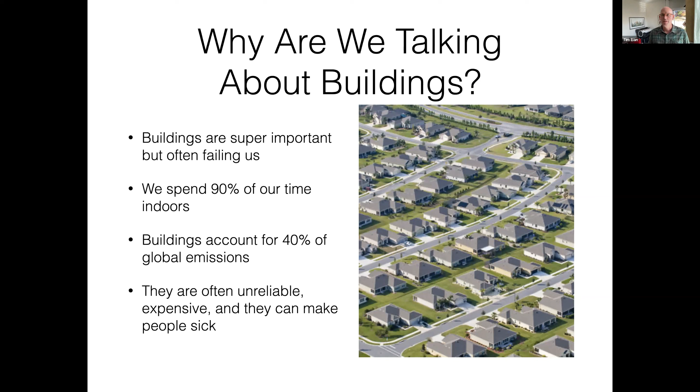So often the first question is, why are we even talking about this? Aren't all buildings green? Well, in reality, buildings are very important to us, but they're often failing us. We spend a lot of time indoors, and buildings account for 40%, some say even more, of global emissions. And they're often unreliable, expensive, and they can make people sick. So these are the reasons why we're still talking about green building.

So if we for a moment imagine the perfect building, for school, a home, a workplace, entertainment, how would most people describe it? And we're in a cold climate here. So what I hear most commonly is, people want it warm in the winter. They want it cool in the summer. They don't want drafts. They want low energy bills and little to no fossil fuel use.

They want it to be affordable to build and operate, so we're looking at life cycle costs perhaps. Buildings should be healthy and free from smoke, soot, pollen, mold, and bugs. And they should shelter us even in extreme weather events or during power outages. For those living in busy environments, they should be quiet, and they should be a little bit of a retreat, a place where you can think.

And the good news is that all of this is real. In 1991, a guy named Wolfgang Feist built the first passive house in the world in Darmstadt, Germany. And that's what I'm going to talk about today, how passive house delivers on all those fronts.

So let's start with the textbook definition. What is that even? Well, first of all, it's a rigorous voluntary building energy standard focusing on the highest energy efficiency and quality of life at low operating cost. So you can already get a sense that we're answering some of what people want with this program.

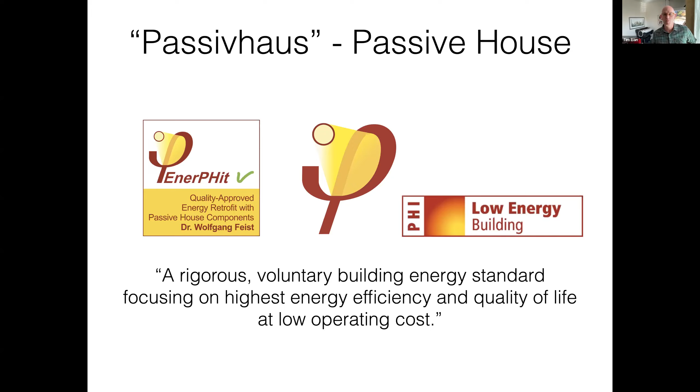It is a global standard. So the concept behind it is to think globally but build locally, and it is climate zone specific. So these buildings will adapt and look slightly different depending on where you are on the planet. It's also a building standard that applies to all building types.

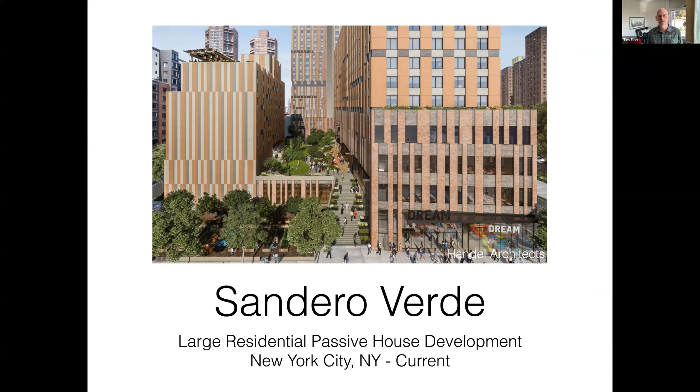I'll give you just a few recent highlights. The city of Frankfurt built a new general hospital that is fully passive house certified, completed earlier this year. In New York City, there's a full block development underway with hundreds of living units and some mixed use units that is a passive house project. In Vancouver, they're working on the tallest passive house skyscraper in the world right now, called The Curv.

It's a third-party certification, and it's really a vetted tool for sustainable design. So it exists on a global scale, and it's been vetted by organizations like ASHRAE, for example, for accuracy and how it's applicable in our environment.

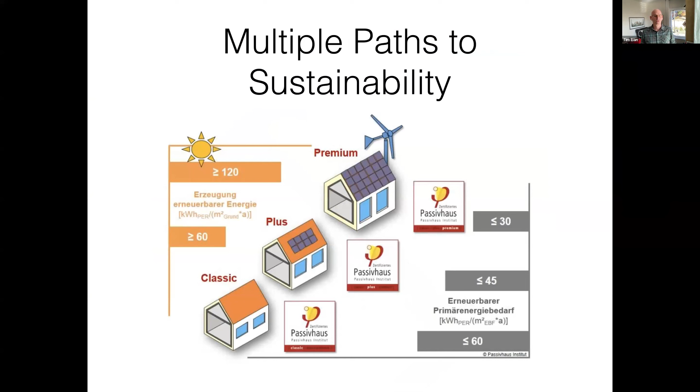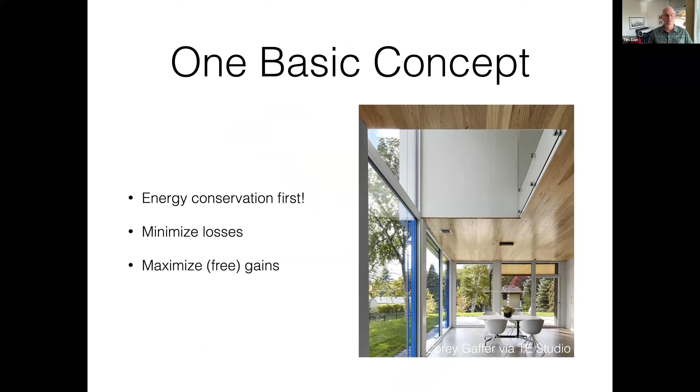It offers multiple tracks, as some other standards do as well. There's sort of a classic, plus, and premium. There's also a retrofit component. And it really revolves around one basic concept, and that is energy conservation first. Let's get rid of wasteful energy use, so minimize our losses and maximize our free gains.

We bring in an adequate ventilation strategy, typically with a heat recovery ventilation system. We air seal the building really tightly so that we don't have any drafts coming in or any heat loss going out. And then last but not least, by design, we reduce what's called thermal bridges, which are generally like superhighways for energy to escape a building through envelope imperfections.

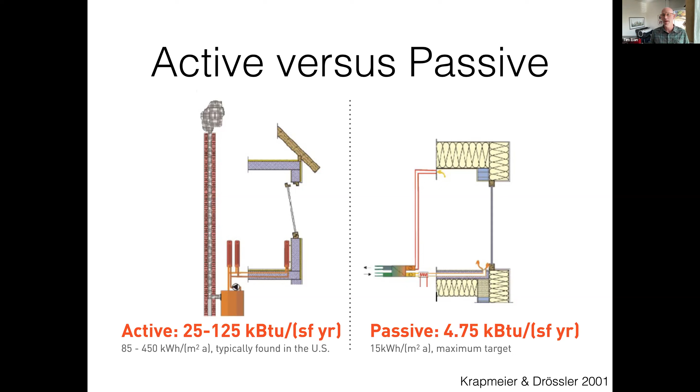Passive house gets its name from the paradigm shift. We're literally moving from buildings that rely on large active heating, cooling, or ventilation systems to something that's much more self-sufficient and is based on passive strategies such as insulation, air sealing, energy retention, and then getting warmed by passive means like passive solar heat gains, for instance. And so generally you can expect a reduction in heating energy need by about 90% over quote normal buildings when you go down the passive house path. So it's really a paradigm shift.

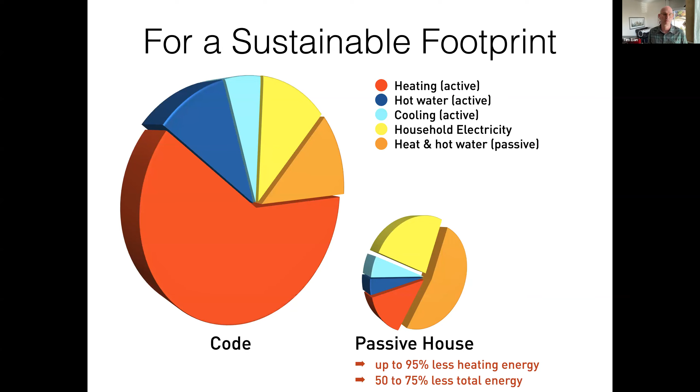A study we conducted in Minnesota showed that if you take the same home, design it to Minnesota code, and then design it to passive house standards, you can expect up to 90, sometimes up to 95% less heating energy use, and 50 to 75% less total energy use. Also, the way energy gets used changes entirely, with heating no longer being the major consumer.

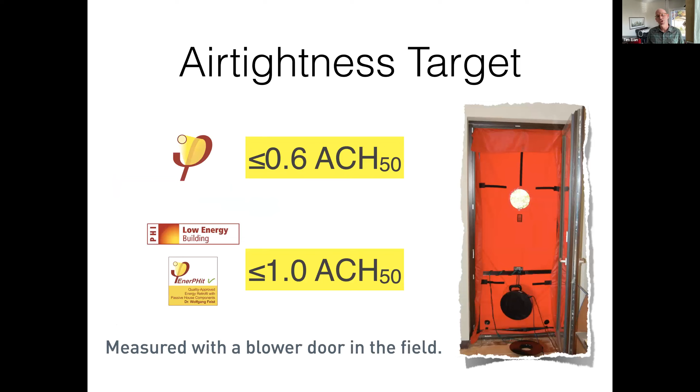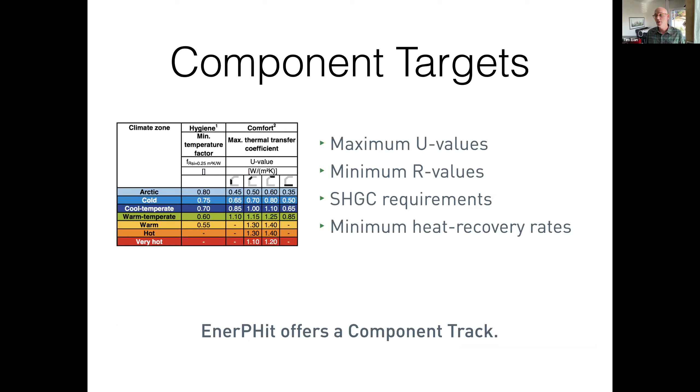When you're doing a retrofit, there are also component targets, because sometimes it's not possible to elevate an entire building to a certain level of performance, but you can still upgrade individual components to a certain minimum level. All of this is typically modeled in design with a tool called the PHPP, the Passive House Planning Package.

This is something unique about passive house - it is not just an aspirational standard. It sets real hard absolute targets and provides the design team and the executing team with energy modeling tools to track their progress all throughout.

I'm going to skip over some of these slides here because we can't do quite the full deep dive. But one other thing I'd like to highlight is that in passive house, we shift where you invest in a building. If you look at this graph, you can see that each component within a building has a different life cycle.

Obviously finishes get exchanged much more frequently than the structure of a building. If we take this grid as 100 years, you can see that we have many finish upgrades throughout the life cycle of these 100 years.

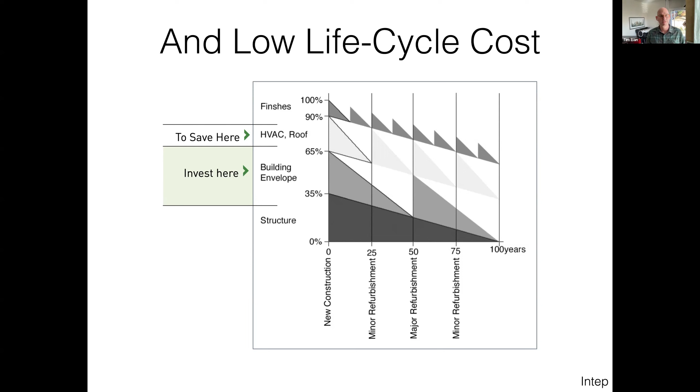But with passive house, what we're doing is shifting investment away from the HVAC component and embedding it in the building envelope - in things like insulation, better windows and doors. These also tend to have a longer life cycle, so any dollar invested in the shell of a building is generally a longer dollar than one invested in HVAC components.

In short, passive house defines the long-term building quality and performance independent of energy supply - we'll talk a little bit about that today as well - and it reduces the amount of useful energy needed to operate the building significantly.

With that, I'll dive into a quick case study of a building that my company designed. It's actually the house that I'm in today. It's called the Good Energy House, a 2,000 square foot single family home in Minneapolis, Minnesota.

We built this a few years back in partnership with some companies and vendors, which I have to thank for making this possible. We're also big proponents of sharing knowledge, as I am with you today. We're members of the Passive House Network, and this project locally was accompanied, prior to COVID, with a lot of open houses and educational events.

We also work with the city of Minneapolis to demonstrate how we can achieve carbon neutrality in the urban core. That's another takeaway from this project.

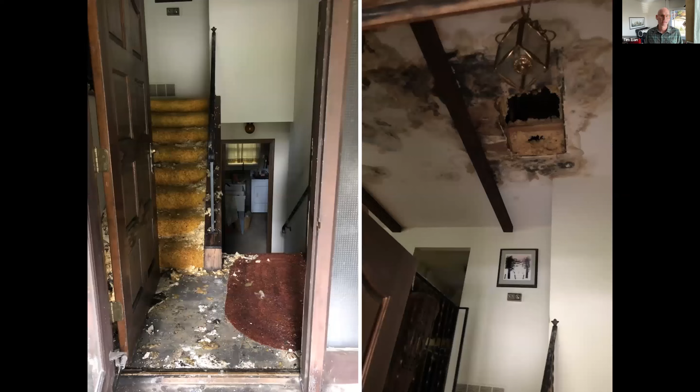We're located in Minneapolis, not quite in the heart of the city, a little bit on the outskirts. This is a typical situation of a tear-down rebuild, which happens frequently in the urban core here where I live. There was a house in quite a bad state that needed to be demolished to make room for this new construction.

One of the benefits we had with this property was that it faces due south, which works well for any passive solar design, such as a passive house.

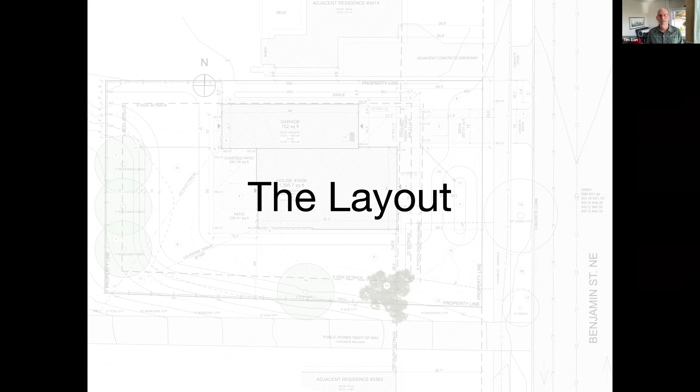One of the key things that changed from the existing layout, often of an entire neighborhood, to this passive house, is that we ended up rotating the design. Where the existing home stood east-west facing, the new home stands north-south facing. The new garage is on the north side, acting as a buffer or shelter for the building.

You can see here on that first floor, where the bar on top is the garage. Everything is oriented properly, north is up.

Just a couple of impressions here. You can see there's lots of glass. One of the urban legends is that you can't have glass in a high performance building. Not true, you just have to use a really good window. These windows are actually the passive solar heat gain collectors, and they deliver about 60% of the heat load

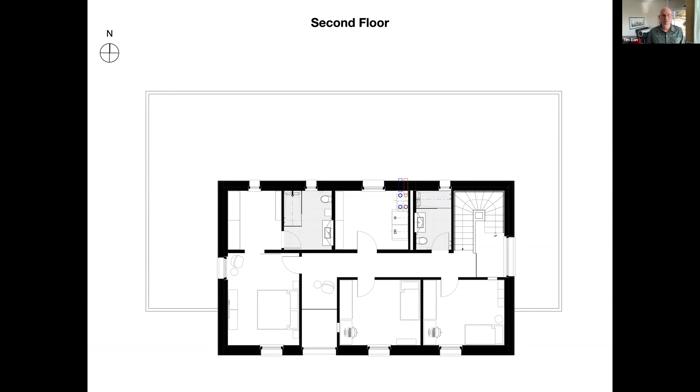for this building over the course of the winter for free. There's a second floor on top. There's no basement here. There's 3 bedrooms, a couple of bathrooms, and a utility space on that second floor. And there's a little vertical space balcony, a little bit of architectural nicety as well. So it doesn't just have to be an economy box. You can have quite a bit of architectural freedom when you're working with passive house.

So what's under the hood? What makes this tick, or what makes it different? Well, first and foremost, the building envelope. That's really the focus of a passive house. Just to give you some comparison, everything is insulated from the foundation that the house rests on all the way up to the roof. And most of it, compared to Minnesota code, you can anticipate about 2 to 3 times the level of insulation to get to passive house levels. When you do that, you're really changing the game for how the building behaves.

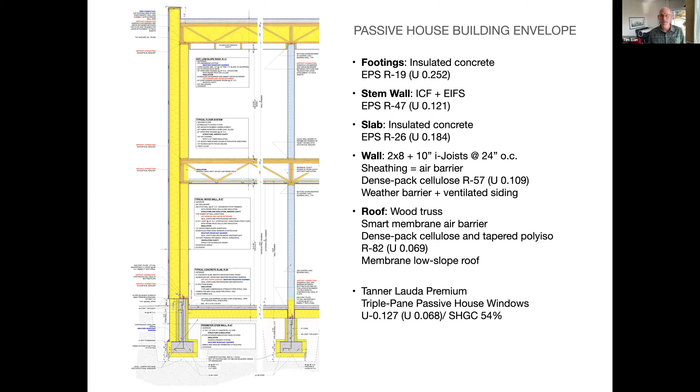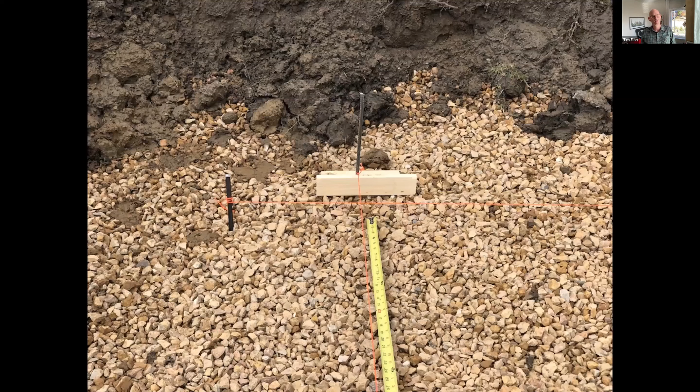We're going to go from the ground up. I'll show you what some of this looks like. So excavation, similar to other buildings. One change here is we have to make this nice and level and smooth, because the whole building will be footed on insulation. In our particular case, this is footed entirely on foam. There are efforts to also get away from foams in construction, which has other benefits. But when it comes to load bearing, foam at the moment is still the best way to go about it.

The foundation walls are built from insulated concrete forms. You can see them being delivered there and then erected right here. For those of you who have never seen these, they are essentially forms that stack a little bit like Legos. They provide a cavity for reinforcement bar and a concrete fill, and therefore a solid foundation wall. You can actually build entire buildings from this material, and we have for passive house as well. But in this particular instance, this house is just set on top of this as a foundation.

In Minnesota, I know some of you may be in completely different parts of the United States, we have to foot our buildings about 3.5 feet in the ground. So that's why you're looking at this, the foundation has to be that deep. Northern parts of Minnesota, we have to go 5 feet deep. So there's no basement, even though this may look like it. This is literally just the foundation and then later backfilled.

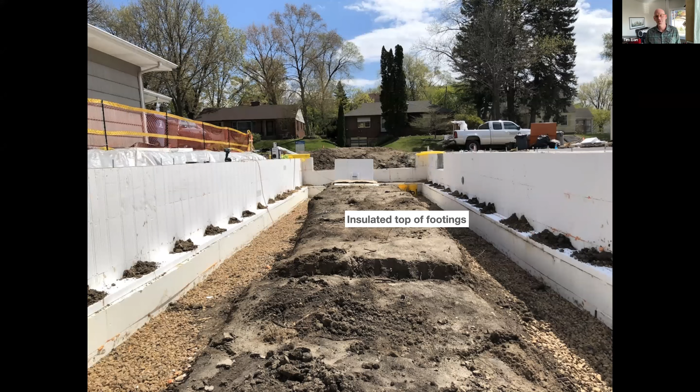A couple more detailed shots here of how these ICFs work and then how they're core filled. At this point, we're creating the load-bearing concrete center of it, if you want. And then more insulation comes into the picture. These ICFs are great, they offer a minimum amount of insulation out of the gates, and then more insulation is adhered to it to give us the R value, the insulation value that we seek. Everything is packaged in that insulation, and then a waterproofing material is installed to make sure that none of this takes on any moisture from below.

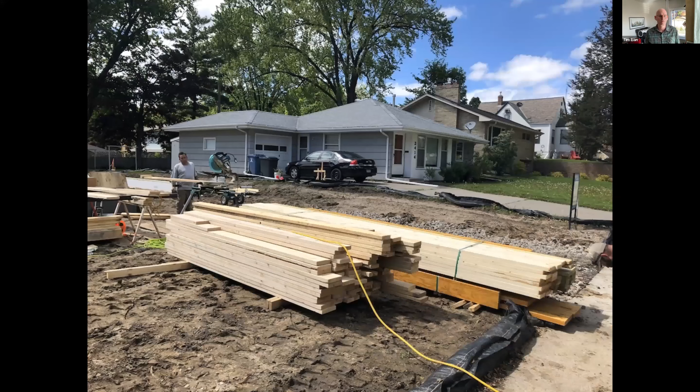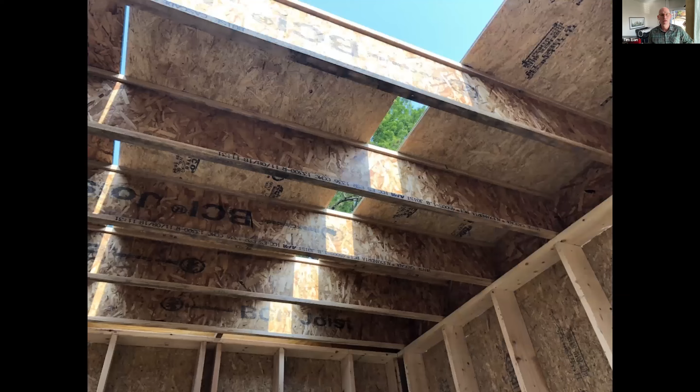So from there, we move towards the construction of the frame of the building. This one here is a wood constructed building. The walls are 2x8s, spaced 24 inches on center, built in a methodology called advanced stick framing, which minimizes the amount of wood used in favor of larger cavities to take on more insulation, because that's what we need for a well-functioning building envelope. The rest of it is fairly standard fare. There are floor trusses, I-joists, and then it's platform framed, so it basically works its way up from the bottom to the top.

This building has a low slope roof, so there are no roof overhangs here, but that doesn't matter. That's a design choice.

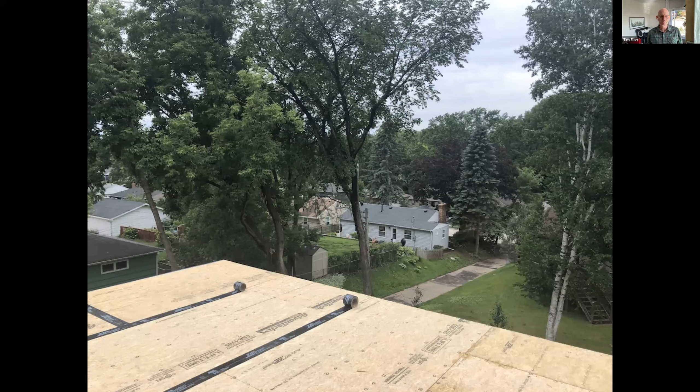And that paradigm extended all the way up to the roof. So on top, there's an air membrane as well that we sealed. Some detail shots here of that happening. And then the wood wall itself was also sealed to the foundation wall down below with more tapes.

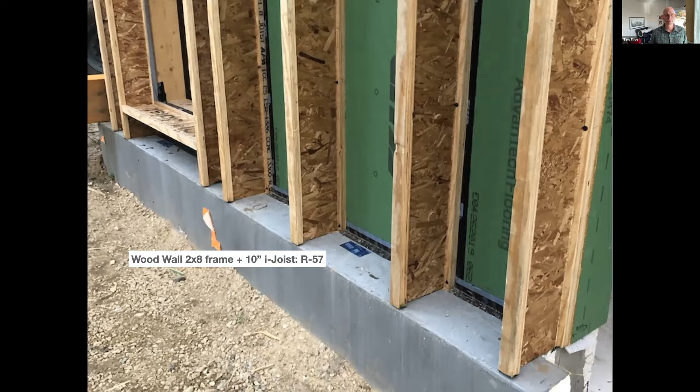The wood wall is a double stud construction. So outside of the 2x8 frame, we used floor trusses, TJIs, 10 inches in this particular case, and ran them up vertically the entire face of the building for a secondary cavity. And they just happened to also make the parapet on the roof, which is something you need when you have a low slope roof. You can see that whole ensemble coming together right here.

We're going all the way around. You can see the window openings being bucked out, so there's basically a frame that goes around that to later hold the windows.

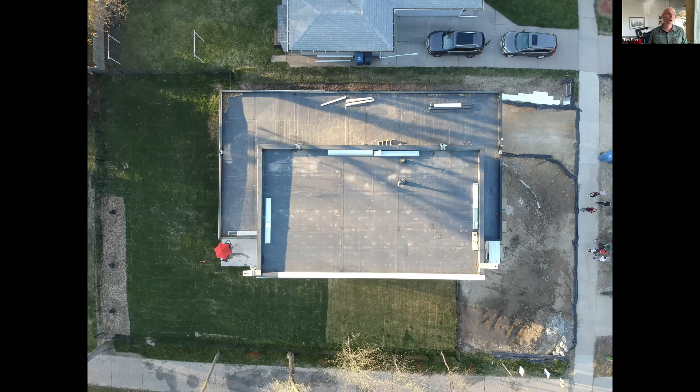The roof gets installed next. This roof is a hybrid construction. The roof trusses are filled with insulation, and there's more insulation with a taper on top of the roof. From there, the water drains from the top of the house to the lower level, and from there into a couple of rain gardens, which in the year we built, we got to test many times. It was one of the wettest years on record, as opposed to the last 3 years, which have been really dry.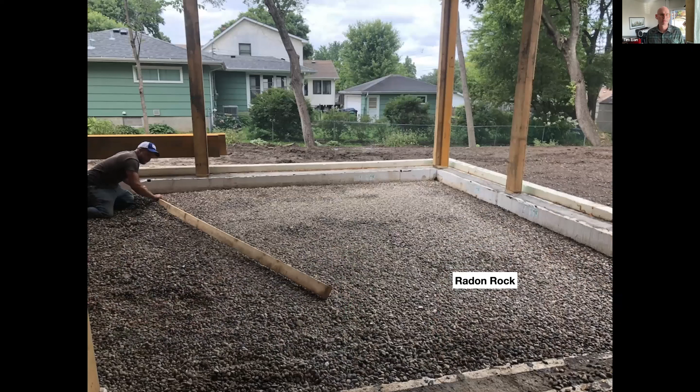So then once the box is installed, we go to the slab installation. As I said earlier, plumbing is already in there, radon system is in there, so you can see that all gets screeded out and laid flat.

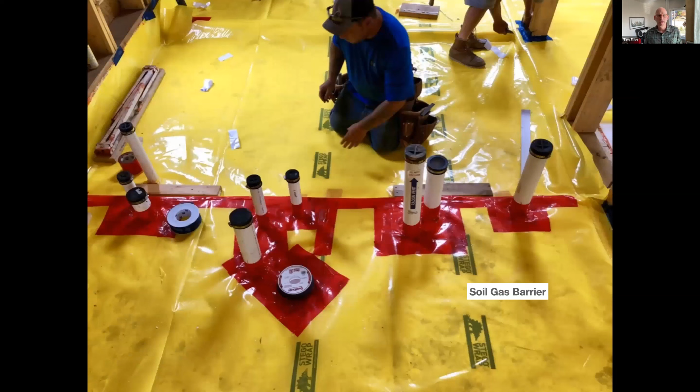Sub-slab insulation comes in. Here in our Minnesota climate, we're using 8 inches, sometimes 10 inches of foam that just gets laid out. And then the next layer is really our soil gas barrier. We want to make sure that nothing leaks up or wicks into this whole system.

And this is where I was talking about well laid out plumbing. We seal around it to make sure that we don't have any imperfections. Next step, reinforcement for the slab, and then the concrete pour to get the slab installed.

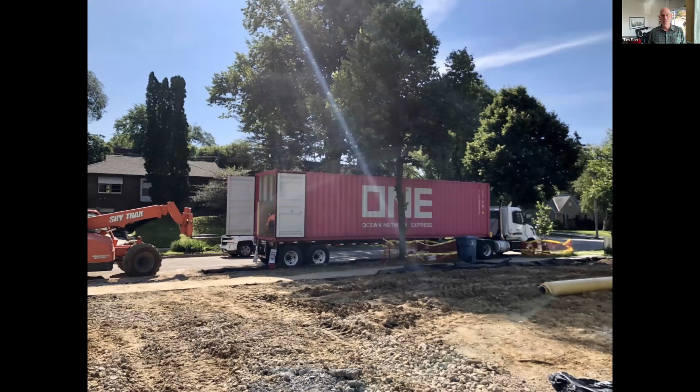So from there, we can move on to the window installation. I'm mixing in some finished product shots here so you can kind of see what that looks like. These particular windows are triple pane units, passive house certified windows. They were made in Europe, which today a lot of them still are. We don't really have much support here from local vendors yet for passive house windows. So they ship in a container to site, and from there, construction workers grab them and install them in the building.

Just a couple of impressions here of that happening. Obviously, the larger they get, the heavier they get. So in some cases, there's equipment needed to move them around.

So with the windows in, the building is essentially sealed up. We don't have any unwanted visitors in the building anymore. Now we can start looking at building it out and insulating it.

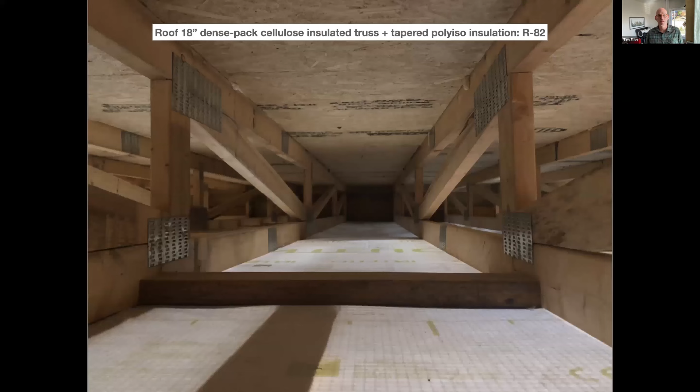This particular building is insulated with blown cellulose, a very basic system using a very low embodied energy material that just gets blown into these cavities. It gets blown into the roof, it gets blown into the walls, and it essentially makes a custom batt, if you wish.

So at the end of it, it molds itself perfectly to those cavities. At the roof, we installed what we call a service cavity, so the ceilings are all suspended down and any mechanical systems are built inside of the shell. That's good because we don't have any protrusions going in and out of that well-insulated, air-sealed shell, and no weak spots in that shell.

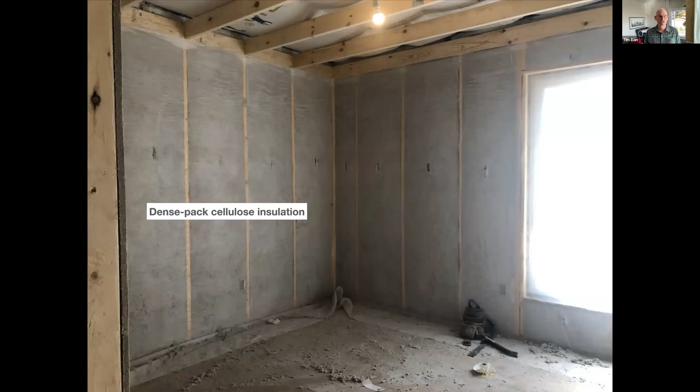Just a couple more impressions here of the frame of the building. Here you can see why we try to reduce the amount of lumber in the wall, just to really maximize the amount of insulation we get out of the system. So part of the house was insulated from the interior, part of it was insulated from the exterior. There's just a quick shot of how that worked.

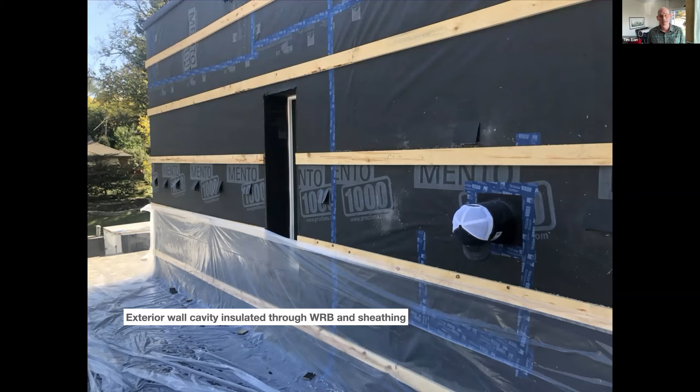Once that shell is in this state, we do some rough blower door testing, making sure while we still have access to the building that we can correct any leakage that might be happening here. This is commonly done with a blower door fan, maybe some tracer gas, as you can see here, or a spotter. In passive house, we have an air tightness limit of 0.6 air changes at 50 pascals, for those of you who can associate that.

Minnesota code, by the way, is 3.0. So a passive house will be 5 times tighter than code allows. And this building here blew a 0.36, which is again almost twice as tight.

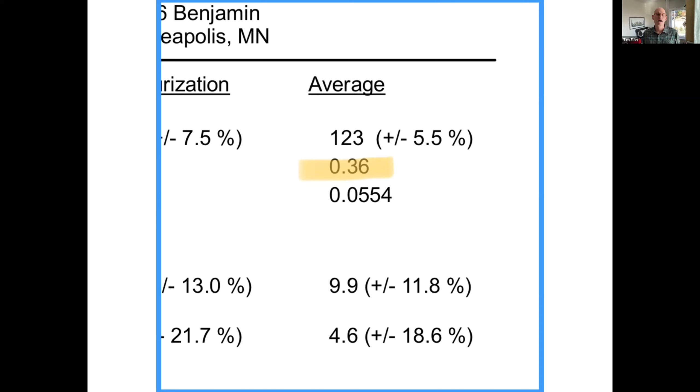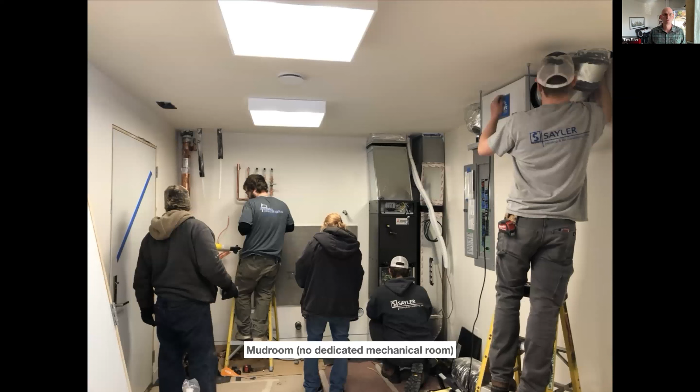At the rough-in stage, with that complete and out of the way and checked off, we can focus on mechanical systems. This is where we connect perhaps with a green grid and renewable energy systems, because one of the things that happens when you build a passive house is your loads are so low that it makes an ideal candidate for heat pump and electrification.

So what you can see here is both a heating and cooling system on the right and a domestic hot water system on the left. Both of them are heat pump based systems. And that works even here in Minnesota, where we have a design temperature of -20 Fahrenheit. So we're actually able, with a cold climate heat pump, to still heat this passive house with an air-to-air heat pump through the winter.

For ventilation, that was one of the main components of a passive house. We bring in a heat recovery ventilation system, so essentially the entire house gets ventilated 365 days a year, 24 hours a day.

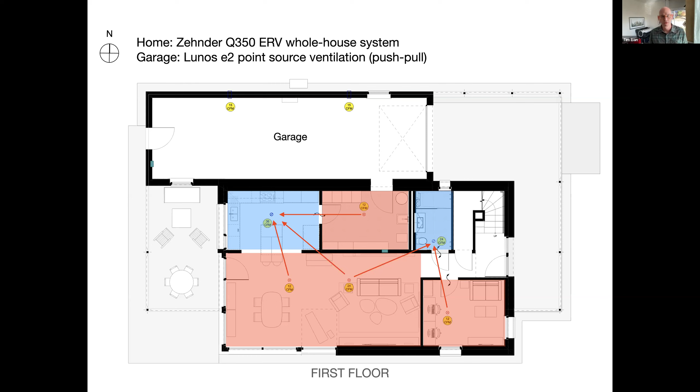You can see in red the zones that get air squirted into them, and then in blue the zones where air is being picked up and thrown back outside. So in short, we bring air into the living spaces, offices, hangout spaces, bedrooms, and we extract it from kitchen, bathroom, and laundry spaces, thereby removing contaminants, odor, and moisture from the house continuously. There's really no way to achieve this level of air quality with window ventilation. And all of this is filtered as well, right in the machine.

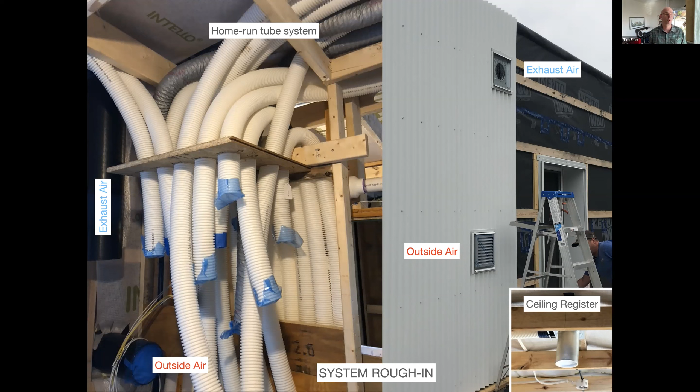So here's a quick overview of how a system like that looks. That spaghetti you're looking at right there is dedicated plumbing or piping for those air streams to and from different parts of the home. You can see in the lower right-hand corner a little ceiling register or rough-in register. These pipes are only about 3 inches in diameter, so that's just about the width of your hand. And again, this runs all the time, and thereby they don't have to be large. It's also extremely quiet—arguably, it's inaudible.

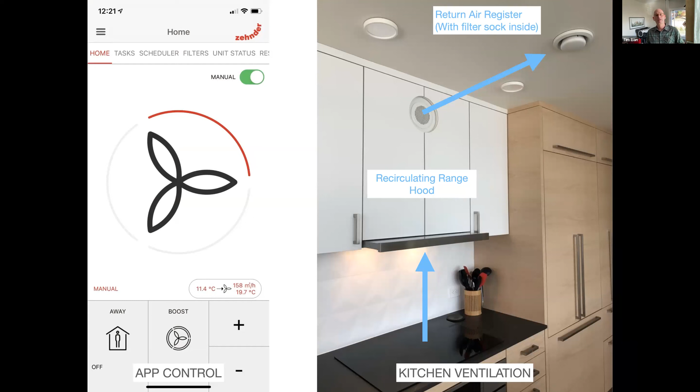In lieu of any exhaust devices in the house, such as a range hood or a dryer, we use this whole house system to continuously turn and evacuate spaces that produce moisture or odor. So case in point, in our kitchen, we have a recirculating range hood with a grease filter and a carbon filter for odors, but then from there, the air is picked up and brought outside through the whole house system.

These vents are fairly unobtrusive. These discs are about 6 inches in diameter, and they're fully adjustable to dial in the system. So there's supplies and returns, and that's really all that is.

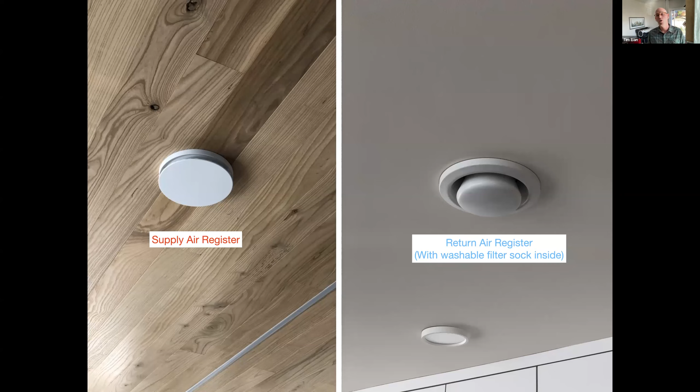The dryer, as I mentioned before, is a heat pump dryer without exhaust, so no perforations of the building envelope. And again, in an airtight building, you couldn't suck on it and squirt something to the outside because there's no hole for that to be replenished anyway.

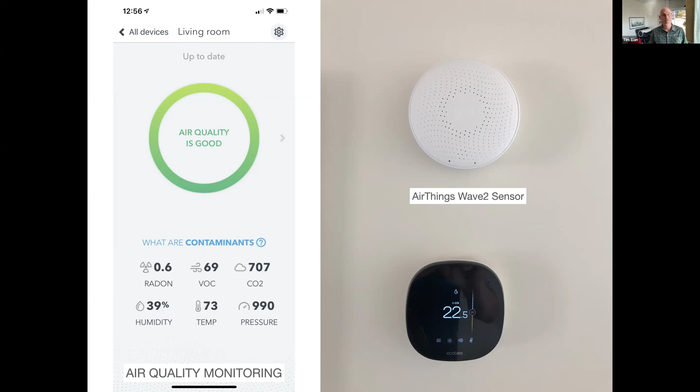So some of these things change in terms of what technology would put in a passive house. We monitored all of this with an air quality monitoring system and find that it is working to spec. So we have generally very good and healthy indoor air quality, no matter what the contaminant load outside of the building or what we're doing inside.

That system can be automated. It can be controlled by a timer. You have control over it with your fingertips. Most of these things are app-based these days. So again, without doing a deeper dive, you have a lot of control over the ventilation in the passive house today.

One other thing I wanted to mention is that the heat recovery in certified units is so good that on a Minnesota winter day with -20 Fahrenheit outside, without any additional heating in the box, we can still supply 60 degree Fahrenheit air to the home, which is quite sensational.

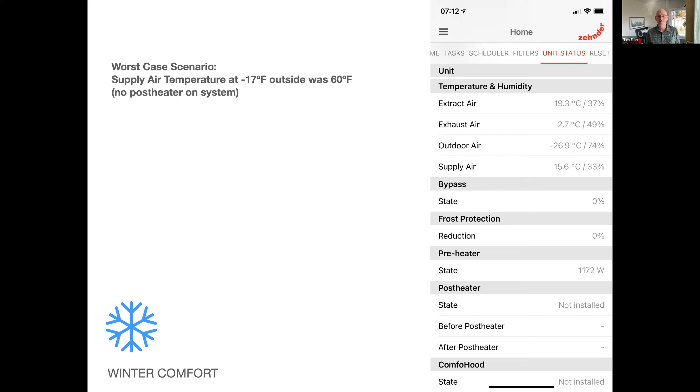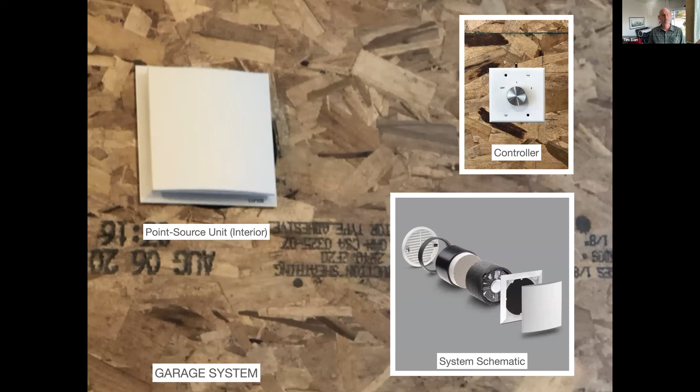The garage of this house also has some ventilation here. These are point source ventilators, and I've seen some people use that all throughout passive house buildings or in small apartments, for instance. So this is a similar idea, but instead of connecting it up with pipework, you're essentially using point sources. There'd be pairs of these installed in a push-pull fashion, which gets you a similar result.

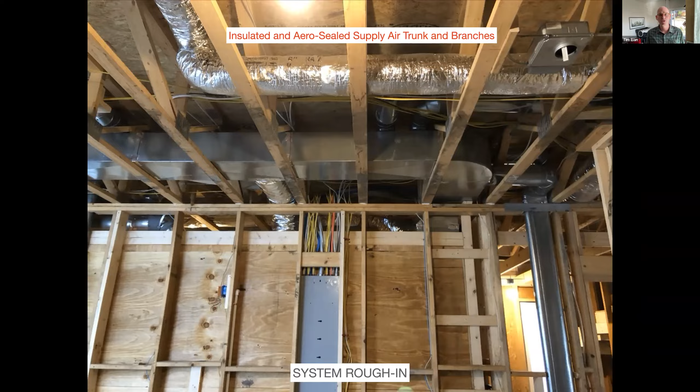The heating and cooling system is in part very conventional in that it is a sheet metal duct system with a supply trunk and a return trunk, which is air sealed. The supply side is well insulated, and then the whole thing is connected up to a cold climate heat pump, as I had mentioned before. You can see that here.

As I mentioned, this is a 12,000 BTU unit. So literally at full bore, it is about the same energy as 2 hair dryers running at the same time that will keep this warm through a Minnesota winter.

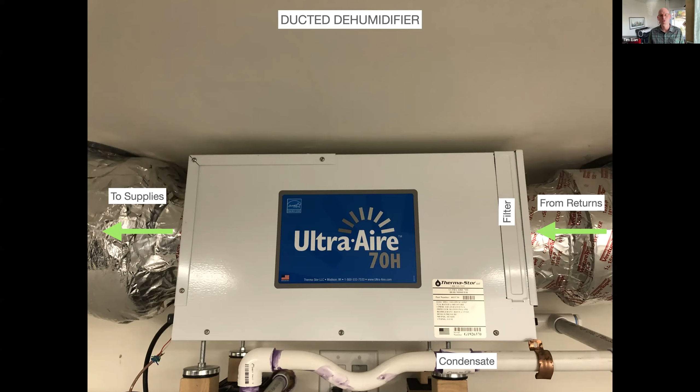We played around with a dehumidifier because I occupied the home. I wanted to see what that does in all reality, at least in our climate zone. We don't really need that here, all but a few hours per year. Some passive house buildings need a humidifier in cold climates. I guess I'm leaving this here as a placeholder just to touch on that subject. So that may be something that's wanted or needed depending on where you're building a passive house.

When it comes to the plumbing, we want maximum efficiency. So all pipes are insulated inside of the building. Hot water, so we don't bleed off any heat from the hot water system into the house itself when we don't start heating the house with the hot water system, and cold water just to avoid any condensation.

And you pair that with an electric heat pump water heater, and my family of 4 here can essentially get by on less than 2 kilowatt hours of electricity per day for hot water, which is next to nothing.

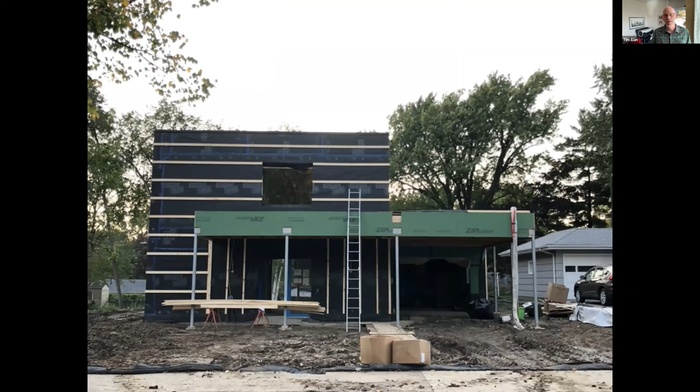I'm going to go fast through some of these because they're not particularly relevant to a passive house. Obviously, if you go to the length of making a building at this quality, you want a really good weather barrier, so I'm just leaving some pictures here to illustrate.

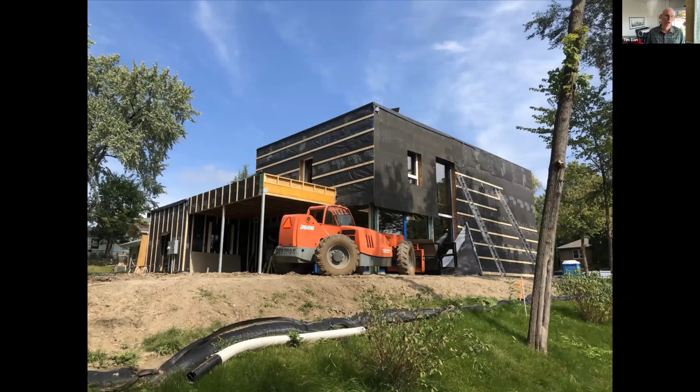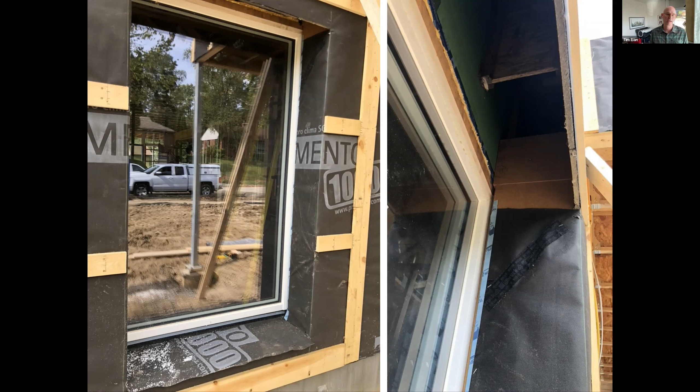We want a continuously wrapped building. Ideally, if we have siding like this building does, a back ventilated siding package, which is good for building science in just about any climate zone around the planet. Care was taken wrapping this building properly and doing a back ventilated siding package. This house also has exterior motorized shades, so above some windows, voids were left to later receive an exterior motorized shade, a little bit like a mini blind on steroids. I'll show you that as well.

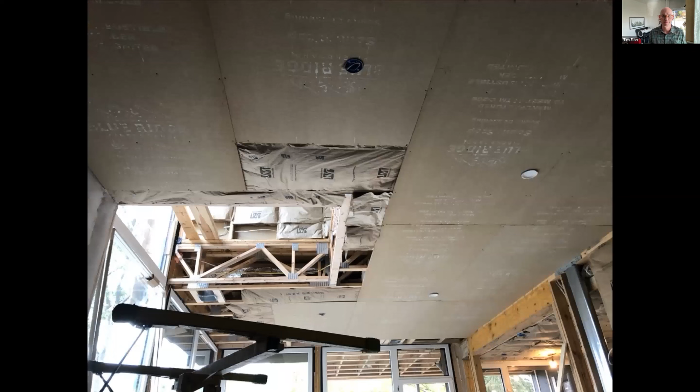So in our case, we took great care of the material choices. Paints and things like that were all low or no VOC, just to make sure there isn't an additional burden inside of that building envelope.

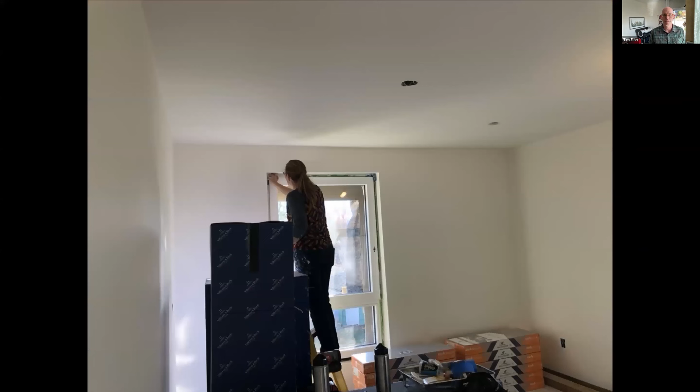And then just some fun opportunities combining energy efficiency with modern technology right here. We used a lot of LED strip lighting built right into the building, so it uses very little energy but gives you good light. It's just a fun and great companion for a low energy home like this. So again, a couple of impressions of the finished product, so you can put two and two together of how that all works.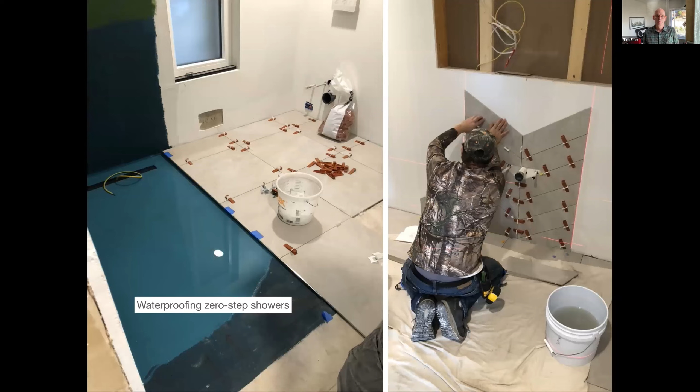So on the material side, maybe one more thought here. There's a lot of talk these days about embodied energy in building materials, because carbon in buildings is not just operational energy, which is what I was just talking about, but also the energy it took to make components. That has a lot to do with the quality of a component, but also the service life. So on this project, we also wanted to demonstrate that.

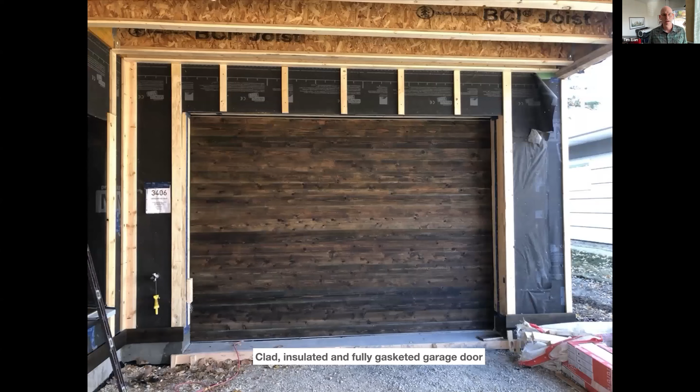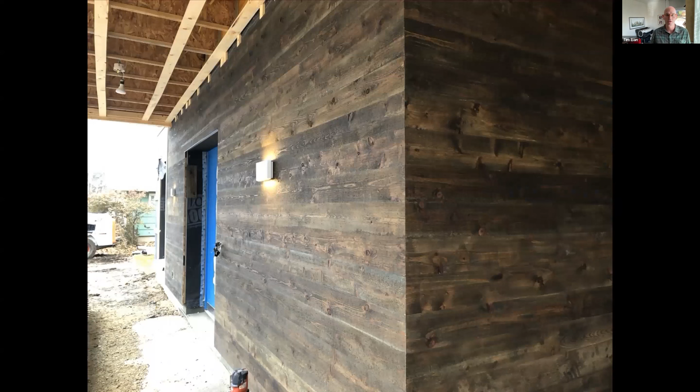Working with wood is great because that's a product that basically stores carbon. So we have real wood siding on the project, and if you back ventilate it, this is something that can really go the distance and last - there's precedent in extreme climate zones for wood structures lasting hundreds of years. That's something you can look at.

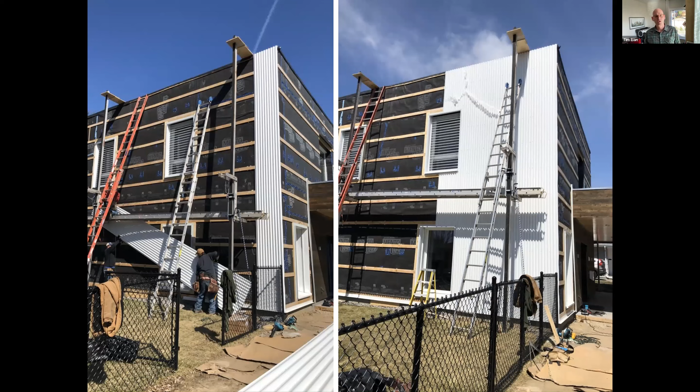And then the other part we did here is we used steel siding. Minnesota has a pretty aggressive climate, and so using a material like metal, which is very durable and has a high recycled content, can be a great alternative. Again, properly installed over these furring strips, so it's back ventilated. This will also go the distance and needs very little to no maintenance, so it falls right in line with the idea of making a building that offers low life cycle cost.

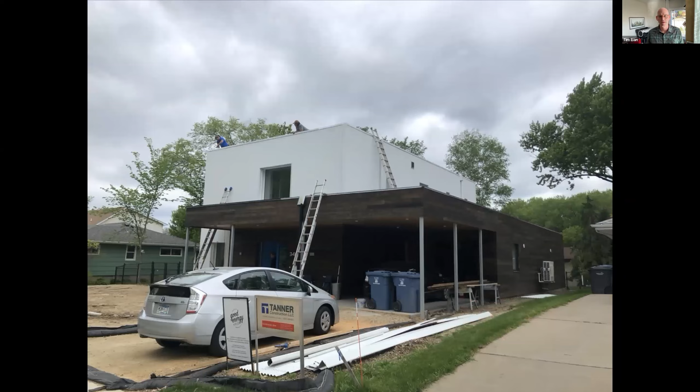So here you can start to see the whole thing as it comes together, and you can also see the shades starting to pop up in some of these pictures. You can see that sometimes they're down, sometimes they're up. I'll talk a little bit more about that.

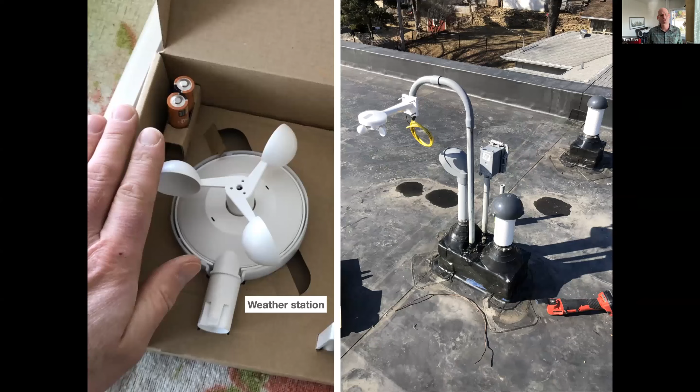So you take all that in sum, and these things can essentially navigate for themselves based on some parameters that we set for them. So this comes into play in a number of different scenarios.

Most people think about shading in terms of summer, but actually in the summer, especially on the south side here in the Midwest, the sun is so high in the sky that the windows practically shade themselves. So really this is much more of a swing season measure, and also a measure for the east and west facades, because that's where we see very low sun angles which penetrate deep into the space. There might be times of the year when that's simply not wanted.

I gave a whole lecture just on shades that you might be able to find online through the Passive House Network, but other benefits, of course, are glare control, daylight control, and privacy, and these things will do all of that.

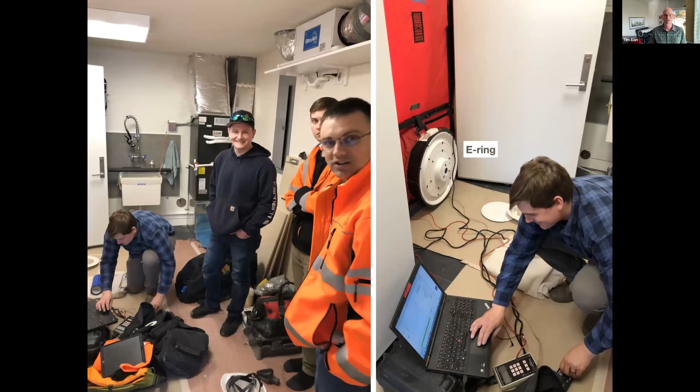Final blower door test is conducted, and this building blew a 0.22 ACH50, so it got a little tighter yet again. It's just about over 10 times tighter than Minnesota code stipulates, and that's good, so there's no leakage here. Now to the part that caters to our umbrella organization for this event here today.

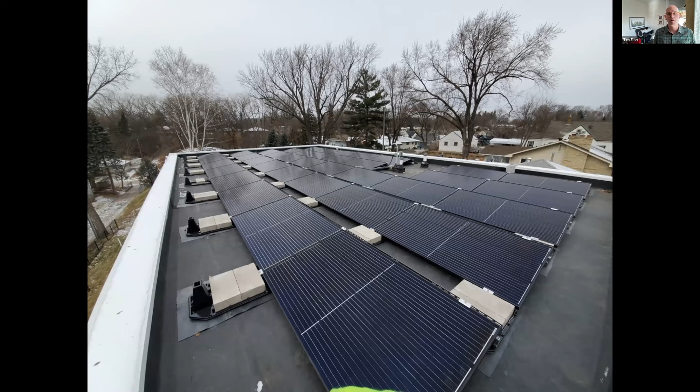We also installed a solar PV system together with some monitoring on the roof. You can see it here in all of its glory. The roof was filled up with 38 panels, about a 12 kW ballasted system up there. It was installed in the winter, doesn't matter. In Minnesota, we do work year round on projects.

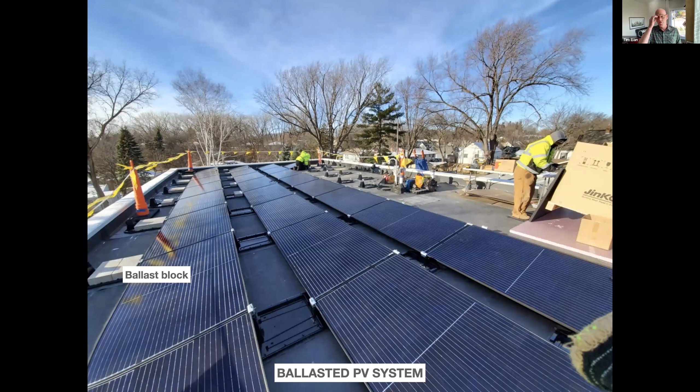And so this 12 kW system provides us, in its second year now, with a full offset of everything that happens in the building below. We can squeeze some of our driving into that umbrella as well, but depending on how significant of a winter we've had, sometimes it fits, sometimes it doesn't. In the first year, I think we were left with about 2,000 kilowatt hours from driving that didn't fit in the umbrella. This year, it looks like it may be somewhat similar.

It's hard to know how cold, and how quickly, it'll get here in Minnesota before the end of the year. But what I'm suggesting here is that with its own roof, a passive house property, even in a severe climate zone like Minnesota, can become net zero over the course of the year, which is really a tall order. And again, this is all electric. There is no gas, no cop out. There is no gas burn, no oil burn, no fireplace or anything else making up for the bulk of the difference here. It's just energy retention through passive house means.

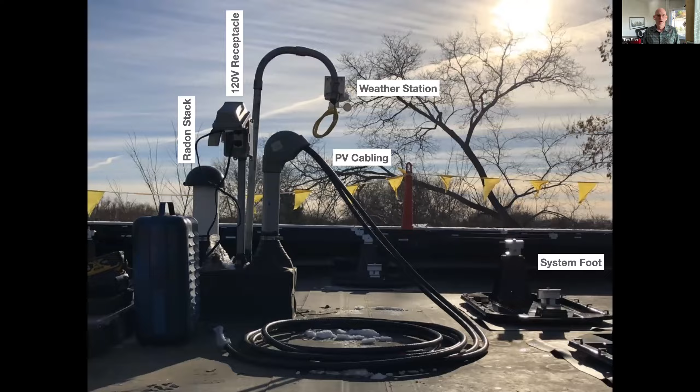All right, so there's another impression of the panels on the roof. We monitor everything with an e-gauge system. I won't have time to get into that today, but if somebody wants to look at numbers, they can always contact me and I can tell you what we're seeing here.

So let's do a quick dive on the benefits of passive house in regards to green grid, renewable energy. What does this all do for us? Why do we build passive house buildings? Well, the climate is changing. You've probably heard this before. A few years back, I gave an entire lecture on this called The American Dream Redefined. We really have to change the way that we go about business to fit into the world that we live in and make sure that we don't go extinct.

In 2013, the average American sat on a carbon footprint of 20 tons per year, when 1 ton is thought to be about sustainable. So it's kind of turning into the American nightmare of the 21st century. That equates to about 12,000 watts per person of continuous energy above our heads—think of that as light bulbs burning over your head. Back then, only 1,250 of those watts came from renewable resources, the rest from non-renewable.

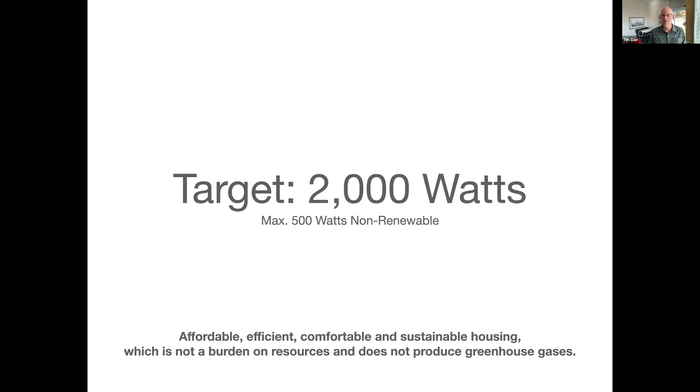This looks a little better today, but not significantly, especially if you're living in Minnesota. The target—that 1 ton a year—equates to about 2,000 watts, and off that 2,000, only 500 can come from non-renewable resources. So how do we do that? We have to ladder up to a different paradigm here.

We have to look at this sufficiency plus efficiency paradigm versus just making clean energy. Why? Because the clean energy plan alone is going to make us very vulnerable. It's not very resilient, and it will cost us an absolute fortune. So what you're looking at here is just how do we get on top of those remaining 8,000 watts.

What I'm suggesting, especially for the built environment, is that we do that with passive house. We simply do away with wasteful energy use, we reduce it altogether. And if we do that successfully, we darn near have enough renewables on the grid to run the show already. That means we don't have to build so much clean energy, which saves money and makes us more resilient. So I offer up that passive house is foundational, not aspirational, as it's sometimes portrayed in the media. In the passive house realm, we coined this phrase: efficiency is the first renewable energy. I hope that resonates with you here today.

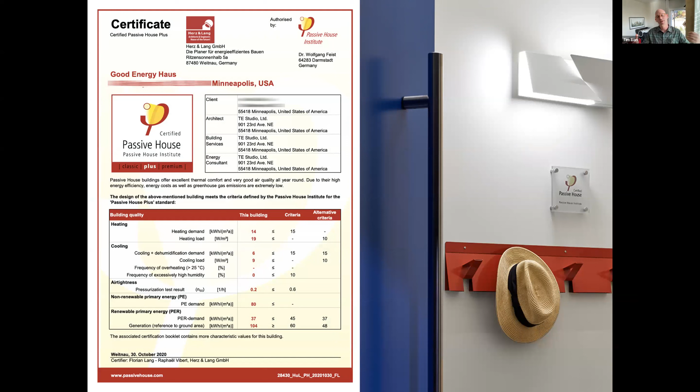Just a couple of things to bring it back home. It is a third-party certified standard—people can get certified, products can get certified, buildings can get certified. There's some value in doing that. I always want to plant the seed for that as you're taking this into your community or thinking about passive house: please also consider certification. It's one thing to say I'm doing something; it's another to get a third party involved to testify to the fact that you actually did.

So with that, just a couple of impressions here of the finished product. Again, this can look many ways—we can do architectural designs, we can build more conventionally. You saw some examples of different building types. So again, it's not just a residential standard, even though the name sometimes suggests that.

As my message to you here today, I also want to leave you with some action items that you can take forward. What can you do? I think what you can do is actively think about and consider passive house when you're looking at real estate, be that a remodel or a retrofit—they have the EnerPHit standard for that. For new construction, if you're a politician, a stakeholder, a developer, a decision maker, or in real estate, think about the passive house standard.

Consider it for renovations and new buildings in the realm you're dealing with. If you're a decision maker or a politician, think about requiring passive house for public buildings—provide that leadership. Think about implementing it in private developments. There's plenty of developers now who have elected to make this their own yardstick.

Why? Because the mid to long-term economics of passive house are very favorable. So if you're an owner or developer holding real estate, this is going to be the cheaper route. Beyond the environmental, comfort, and other benefits I shared with you, you can make some money off of this as well. And if you're in a position to do so, consider getting passive house trained and/or certified—you can become a designer, a consultant. There's a tradesperson program, and if you sell or make products for buildings, there are certifications for some of these products as well. These are all things you can do and bring to your community to get the word out on passive house.